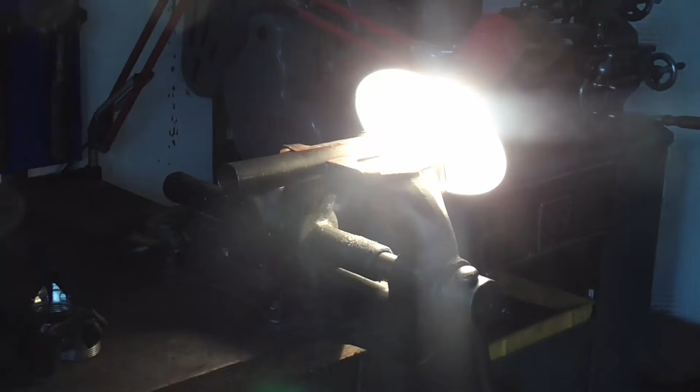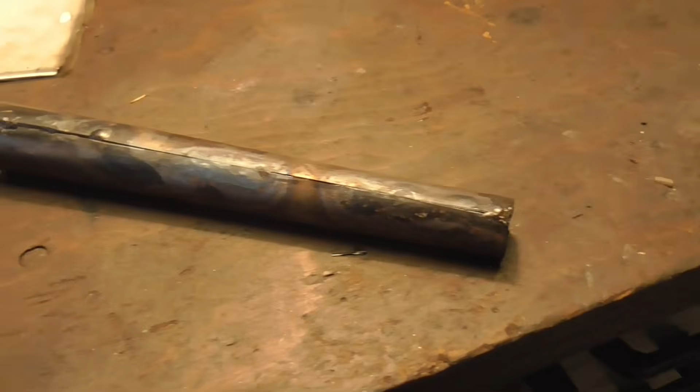Doesn't look too shabby actually. Right here something happened that I don't know what, because suddenly there is an overlap and I didn't chuck it up in a way that there was one.

Anyways, I think we can grind that flush, and for the rest, yes, there is a small seam visible, but that's alright. The originals were just folded over tin strips, which will have a parting line as well. So if we tidy that up a little bit and blue it, it's gonna work just fine.

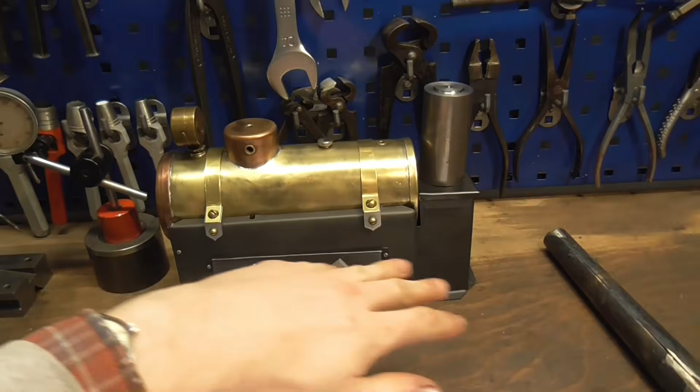We've got the boiler house, we've got the chimney. Now I want something to have the chimney rest on. That's this little piece here, and I think it makes sense to make it in conjunction with the crown that sits on top of the chimney.

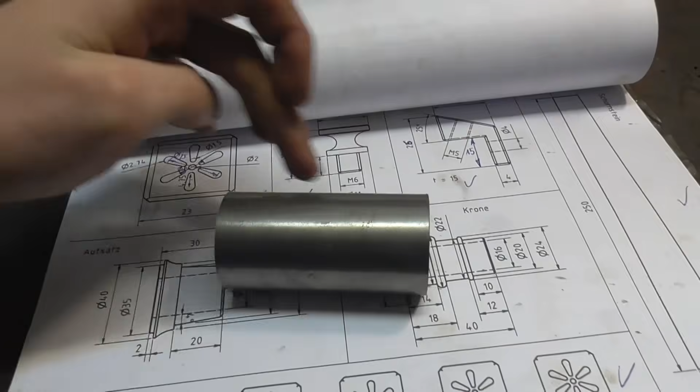Because then I can take it from one big piece of raw stock, machine both sides of it, and then part it in the middle without having to worry about space to chuck it on and wasted material due to cutting off.

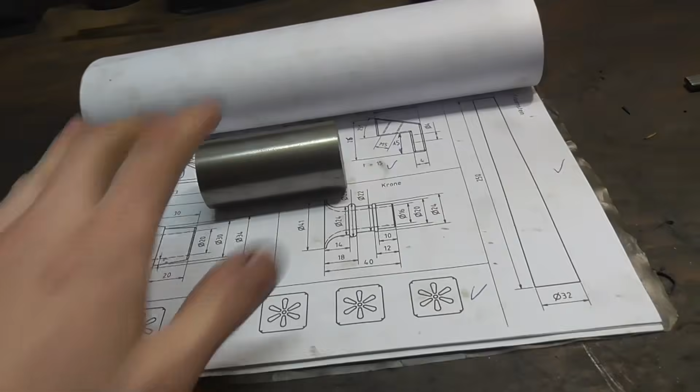It's just split right in the middle, and both sides are going to be happy. So yeah, it's going to look a little bit odd, but when you've got the big plan ahead of you, then it's all going to make sense.

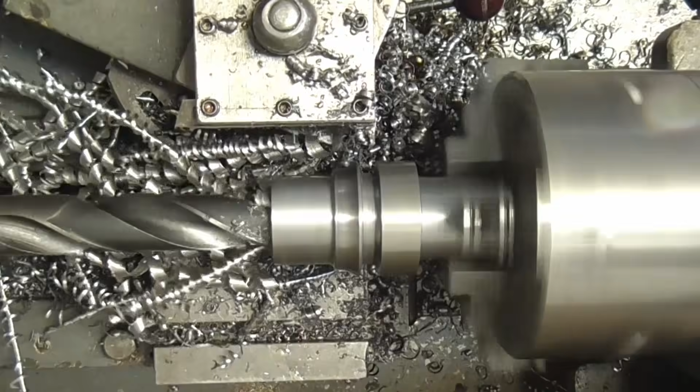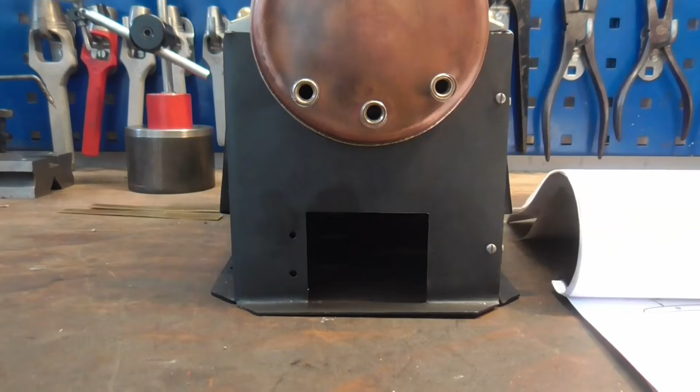Next, I think it's time to shut this hole on the firebox. The recipe is going to be the same as always. Have a base plate with the hinge on here, and then have a frame around it for decorative purposes.

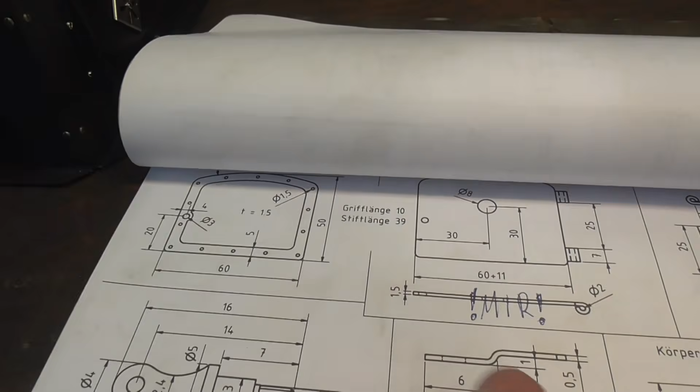Handle and lock, pretty much the same, but with a little different design this time, with holes around the perimeter for rivets, just to make things look a little bit more interesting. I've already prepared 2 blanks here, one for the base, one for the frame. I'm going to drill the holes into them and then hacksaw the contours out.

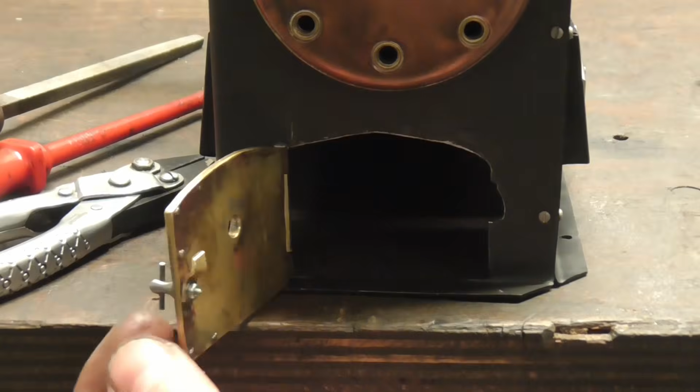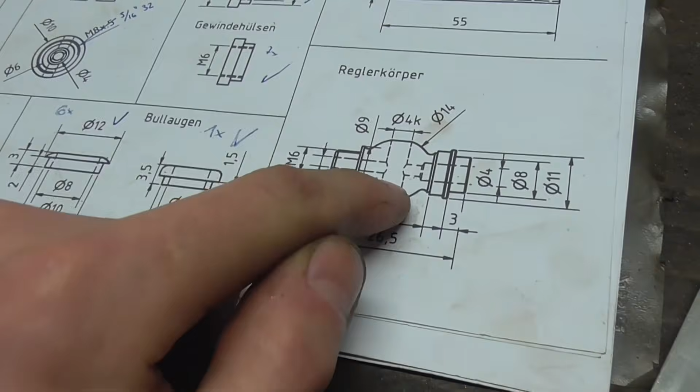Next we'll start filling up all the threaded holes here. I'm going to start with the draincocks, the whistle, and the regulator, because the bodies for them are pretty much all the same. They've got a thread to screw into the boiler, they've got this rounded cross section here for the valve, and then they've got a hole in the other end which a tube is going to connect into.

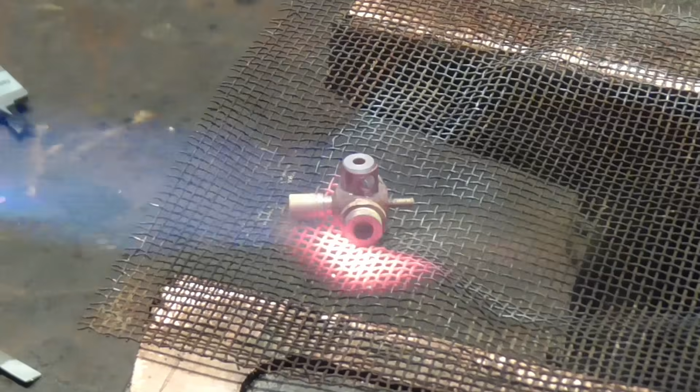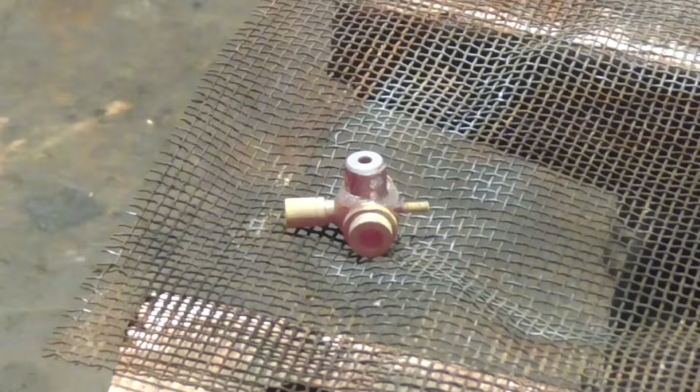It takes longer to make the valves than the draincock bodies themselves. Getting the taper just right is crucial. And the last ones I just peened over at the end.

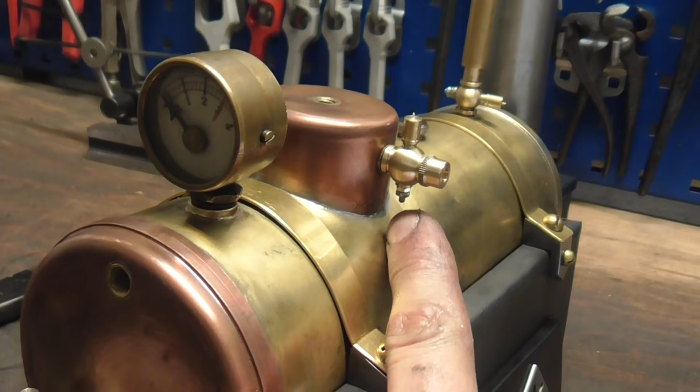After 2, 3, 4 years, I've now realized that's not the real permanently good way to go, because these will start freezing up with the residues from the boiling water and they'll start getting hard to turn. So now I've put a thread on the end, and with 2 nuts and a washer I'll hopefully be able to compensate for sticktivity and be able to take them apart, clean them out if I need to.

Now I'll have to drill the cross holes into here to make them open and shuttable, and I'm also going to improve on that design a little bit.

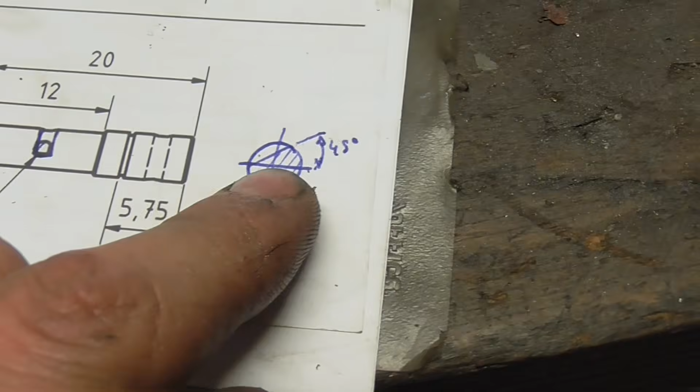Rather than putting a 90-degree angle hole into the one draincock for the water pump so that I can switch between pumping in a circle and pumping feed water into the boiler, I'm now going to go with the diagonal cut slot, which is just going to be tangentially on the body of the thing, because trying to hit two 90-degree holes at a dead center hasn't really worked out.

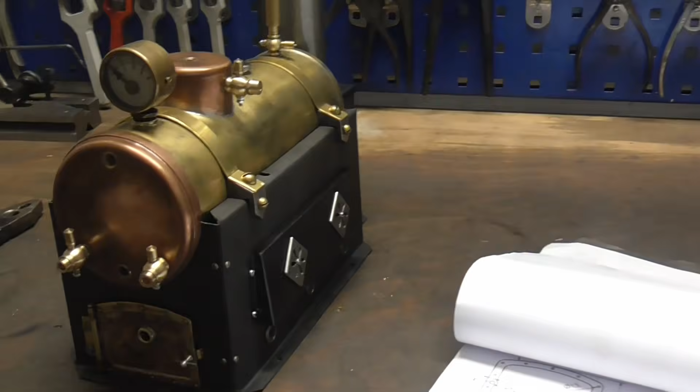It sort of worked on the 362, it didn't work out on the 512. So on the 512, that drain cock is just decorative. And I want to be able to feed water with this one, just as a gimmick maybe, or maybe the huge engine is going to need so much water that it's actually going to come in handy, we'll see. But yeah, little differences, learning from experience as I keep building these things.

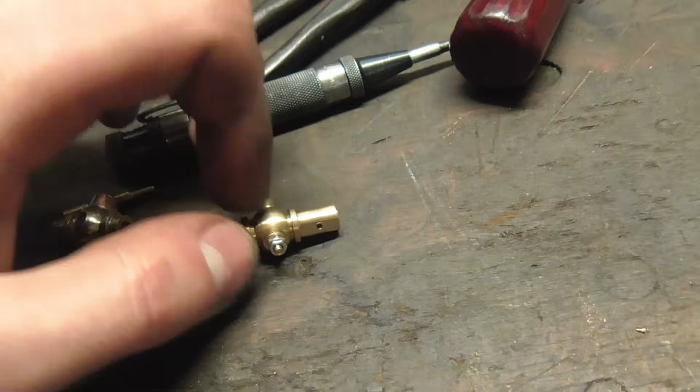And on the whistle, I'm also going to hopefully learn from my mistakes. The whistle on the 362 worked until I then made the mistake to first machine the tube and then the little domes to go on top of it. And rather than have a press fit with them, I made them a loose fit and then later decided to solder it on. And the solder seems to have had such a dampening effect that the whistle is now silent.

And for the whistle on the 512 overtype, I think I cut the slot too wide, so there is no resonance at all. I am always too lazy to make these things twice, so I just left them the way they are. And with this whistle, I'm going to try and get it to whistle and then try and keep it whistling even after soldering. And I think the best way to do that is to eliminate the domes and just make a nice decorative whistle tube in itself.

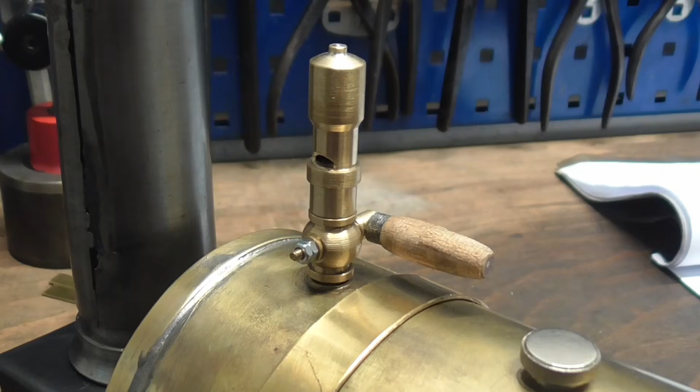I'd like to make the sightglass next. For that we need these square angle pieces, and for that we need some square material. I don't have square right now, but I've got some hexagonal which I'm never going to use, so we're going to take that and turn it into square.

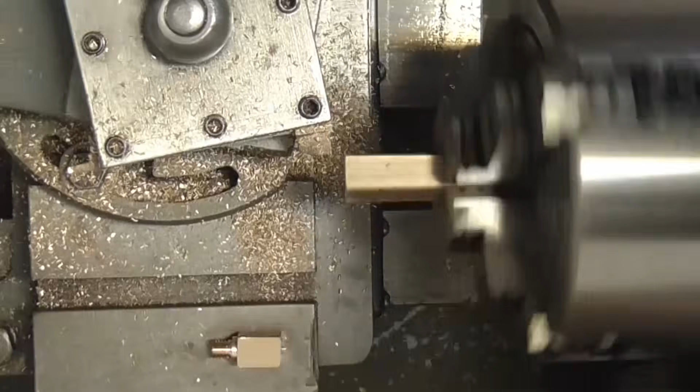So now I've pre-assembled this with a gasket, and then this is just hand tight in here, so I know that I can give it that 45-degree turn. Same goes with this one here, so I know I can drill the hole in here and the hole in here, and then we should be golden.

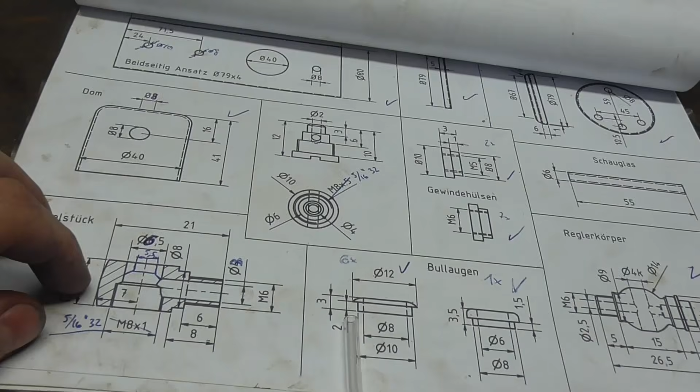I've also taken a look at what I thought out here years ago when I made these plans, and I've come up with that this is not going to work the way I intended it. So I've redesigned things a little bit here.

Here we have the angle piece with a cross hole drilled from the boiler into the threaded cross hole. I'm going to insert a rubber gasket in here. And now the thumb screw is cross drilled as well, right here and right here. And the cross hole will intersect with the small hole in here, transporting the water from the boiler into the tube.

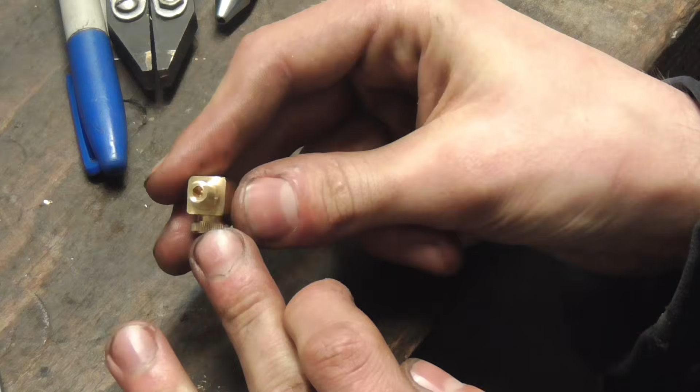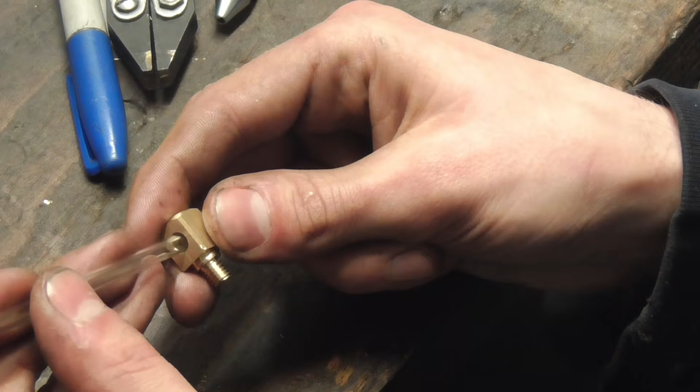So when I tighten this fully down and the two holes align, also when I tighten this fully down, the O-ring gets squeezed together. And when I now insert this tube, well, I almost can't because the O-ring is gripping on it, therefore hopefully creating a seal.

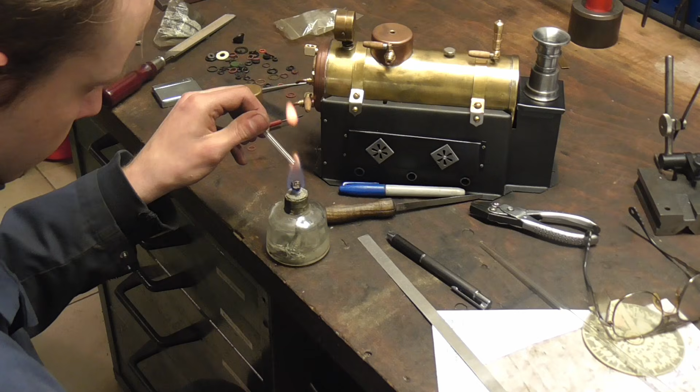And that's how it looks like, all mounted up.

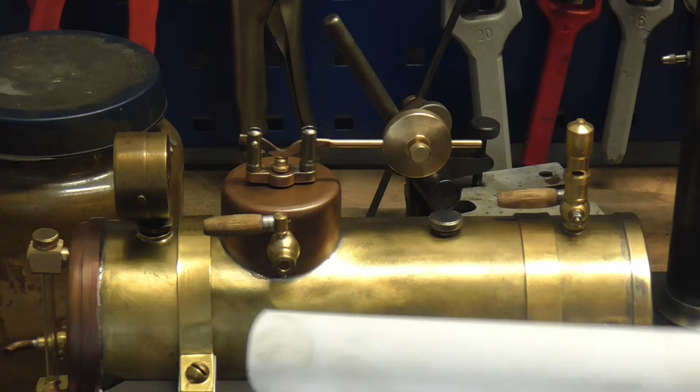Well, there you saw me make the safety valve. I once again deviated from the plans a little bit to create yet again a bit more subtle differences to the last one. For example, usually I would have made the lever for the safety valve out of two pieces, one flat and one round, and then I would make the flange like this. Now the flange is flat on the sides and round in the middle, and the lever is made out of a continuous piece of round stock with flat punched onto the end.

The valve weight is a little different to the ones I've done before, and I think it suits the whole appearance quite nicely. That concludes this video, because in essence the boiler housing is now complete. All it needs is some tubing and a base plate and of course a burner.